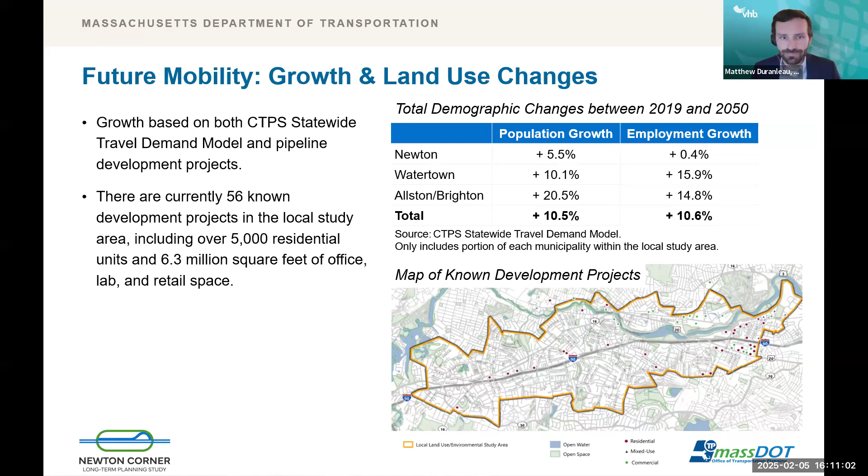We also coordinated with local municipalities and agencies, many of you on the call today, to anticipate changes to the transit and roadway network. On the transit side, there are several improvements currently under development, such as the bus network redesign and the Newton commuter rail station accessibility improvements. As many of you are aware, funding for the Newtonville station accessibility improvements was awarded late last year. We understand transit will play an important future role in moving residents and workers around the study area, and all these transit improvements are incorporated in our 2050 future projections.

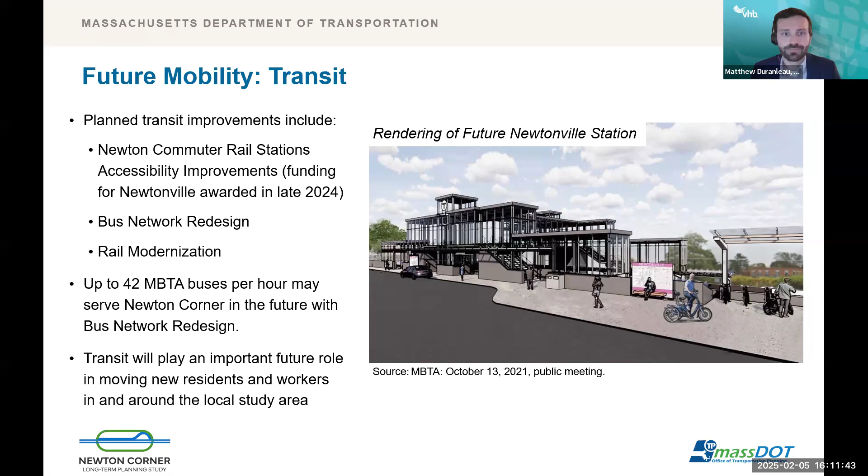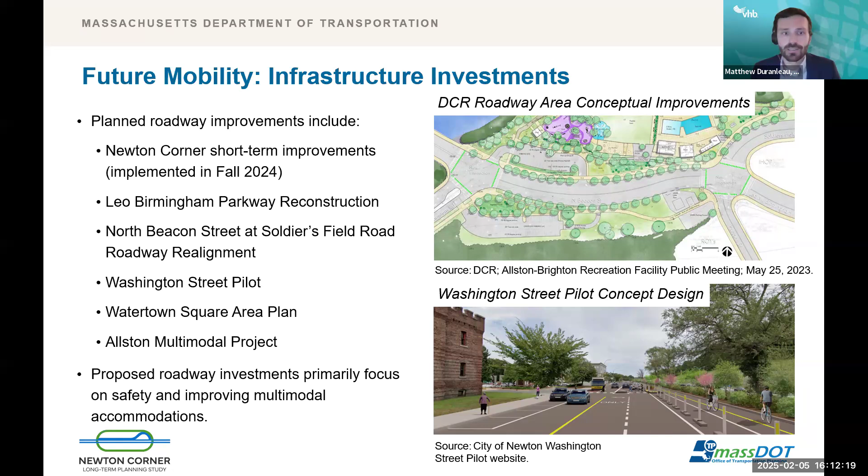Our future projections also included proposed roadway infrastructure investments. There are currently several roadway improvement projects under development in the study area, including the Leo Birmingham Parkway reconstruction, the North Beacon Street at Soldiers Field Road roadway realignment spearheaded by DCR, the Washington Street pilot in Newton spearheaded by the City of Newton, and the Watertown Square area plan in Watertown, to name a few. A common theme in these proposed improvements is that they are primarily focused on improving safety and enhancing multimodal accommodations as opposed to increasing vehicular capacity.

On the active transportation side, we identified several new and proposed facilities for bicyclists, such as new infrastructure on North Beacon Street, Western Avenue, Mount Auburn Street, and Washington Street. Most of these new facilities will improve bicycle connections in the east-west direction. However, based on the currently proposed improvements, there are still expected to be gaps in the future network in the north-south direction, including across I-90 and connecting to and from the Charles River pathways.

With the proposed land use changes and known infrastructure improvements, we reviewed the anticipated volume and ridership growth in the study area. Using the statewide travel demand model, which includes known transit and roadway improvement projects, and calibrating based on known development projects, we found that transit ridership is expected to increase by about 12 to 28%, and vehicle volumes are expected to increase by 6 to 13% in the local study area by 2050.

Transit ridership is anticipated to grow quicker than vehicle volumes due to improved transit infrastructure and limited capacity on the roadway network for additional demand. However, the overall mode shares by 2050 are not expected to dramatically shift, as current network users are not anticipated to alter their mode choices substantially.

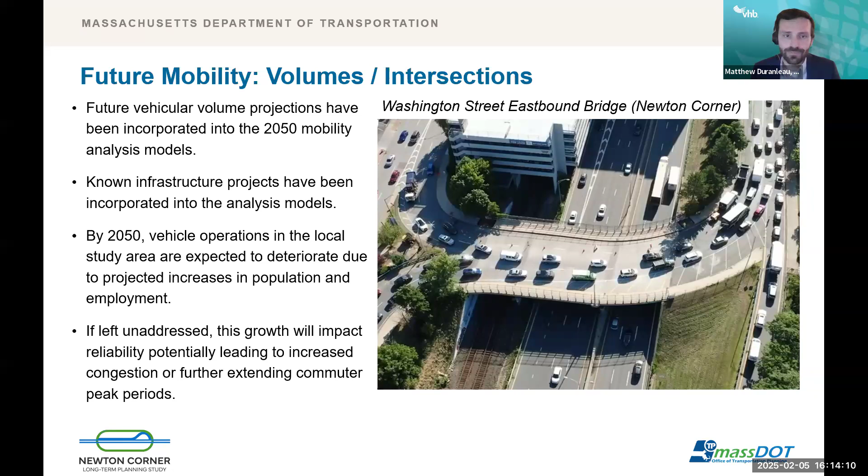The final future conditions element we want to highlight today is future environmental considerations. The study area faces significant risks from extreme temperature fluctuations, increased precipitation, and flooding along the Charles River. By 2050, Massachusetts is expected to experience significant temperature increases. It's important to remember these environmental considerations as we progress into alternatives development.

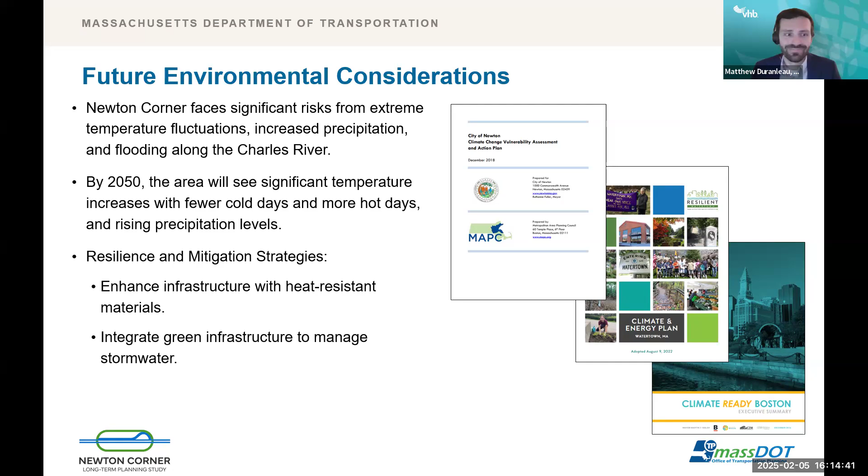As part of this study process, we are documenting issues, opportunities, and constraints. We began this process back in existing conditions and shared a snapshot of the themes related to existing conditions back in October. These were based on a review of existing conditions data, previous studies of this area already completed, and input from all of you, our working group.

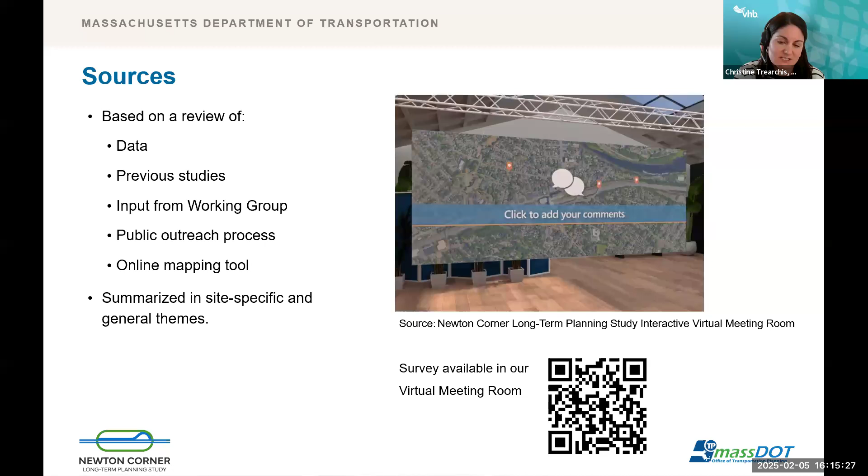Here's a summary of the issues, opportunities, and constraints. I want to note that this is not a complete list, but rather a highlight of some key takeaways. While we've previously highlighted safety, there are persistent and well-documented safety issues. Newton Corner is a high crash location with difficult merges and confusing travel patterns.

Like much of the Commonwealth, our study area is vulnerable to climate change and is anticipated to face extreme temperatures and flooding near the Charles River in the future. Many of the intersections within our study area have documented accessibility shortfalls that should be addressed through the alternatives.

There are opportunities to leverage the existing and potential future MBTA transit services in the area, providing clear connections to bus and commuter rail services. Similarly, there are opportunities to help connect bicyclists and pedestrians to the existing Charles River pathways. While these connections are just a short bicycle ride or walk from Newton Corner right now, they currently are not very comfortable or direct routes, leaving opportunities for improvement.

From an environmental standpoint, we have an opportunity to expand green infrastructure to help reduce heat island effect, improve public health, and manage stormwater. Our study area is also home to natural, historical, and archaeological resources to consider. The Charles River is nearby, and Newton neighborhoods are known for their historic character. Between Route 128 and Boston, there are limited highway exits, which means Newton Corner has to process a significant amount of vehicular traffic. The I-90 corridor and MBTA rail lines act as a barrier for north-south mobility for modes currently.

We've organized initial alternative ideas into three parts. The first is what we're calling supportive elements, which are elements that should be considered under all alternatives. Next are alternative components, individual components that can be layered onto each other to develop full alternative packages. Finally, we have a few examples of how these components could be layered together. We understand there are many different combinations, and these are just a few examples to spark conversation.

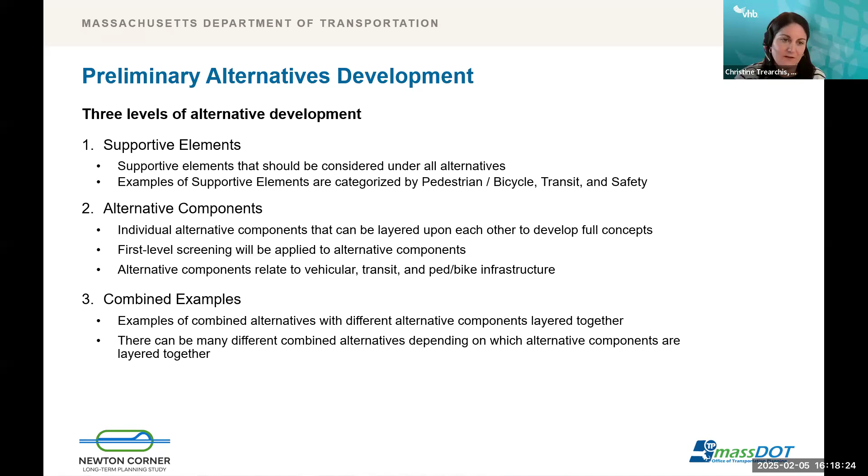First, we're going to go through the supportive elements, starting with pedestrian and bicycle elements. Every alternative should seek to create new pedestrian and bicycle connections through Newton Corner, as well as to existing Charles River pathways. We're looking to develop on-road bicycle accommodations and find opportunities for separated bicycle lanes. We've also included placemaking here, creating an inviting pedestrian environment that makes Newton Corner feel like more of a destination.

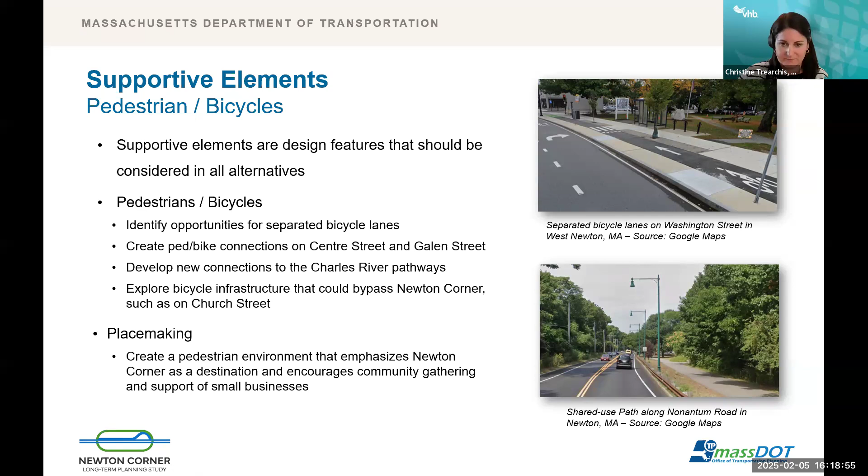Next are transit elements. These are aimed at finding opportunities to incorporate things like transit signal priority, enhancing connections to existing services such as the buses and the Newtonville station, which will be going through improvements to come.

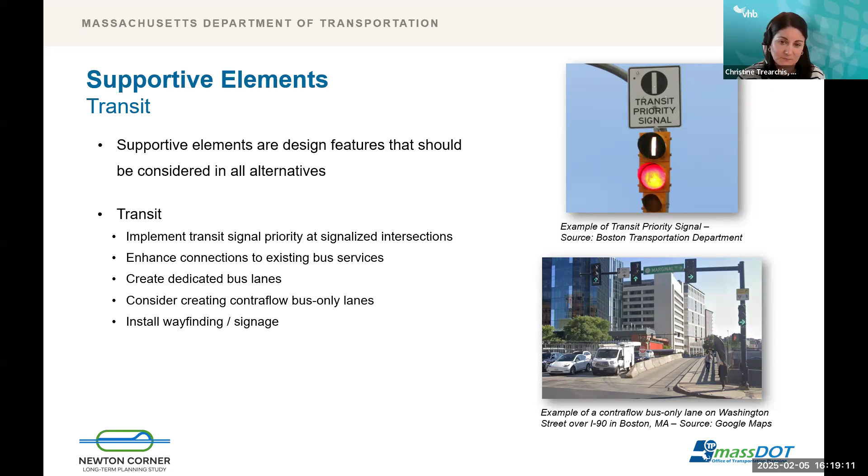Finally, our safety elements. These include trying to provide more conventional and straightforward intersections for motorists, including consideration of roundabouts to reduce conflict points, as well as adding fully accessible pedestrian accommodations and improving things like lighting and signage.

And now I'm going to hand it back over to Matt to discuss the alternative components.

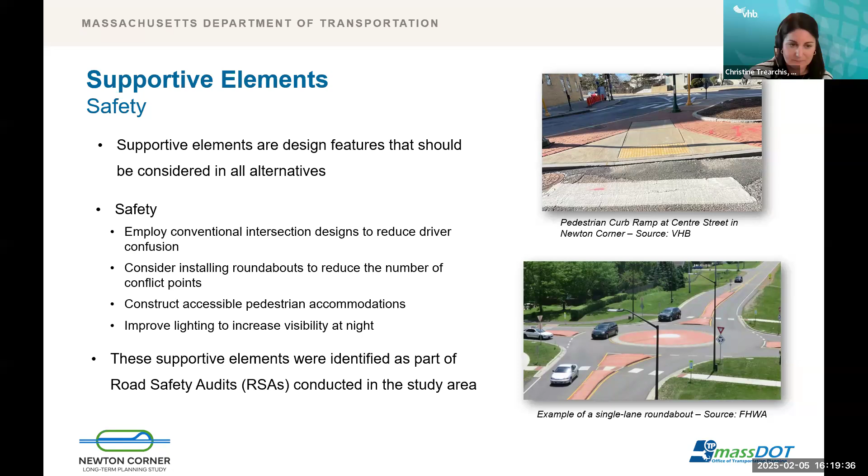Thank you, Christine. Today we have 16 different potential alternative components that we are going to touch upon. These represent an initial list we developed based on previous feedback that we've received, and we anticipate that additional components may be considered based on feedback from the working group and from the public.

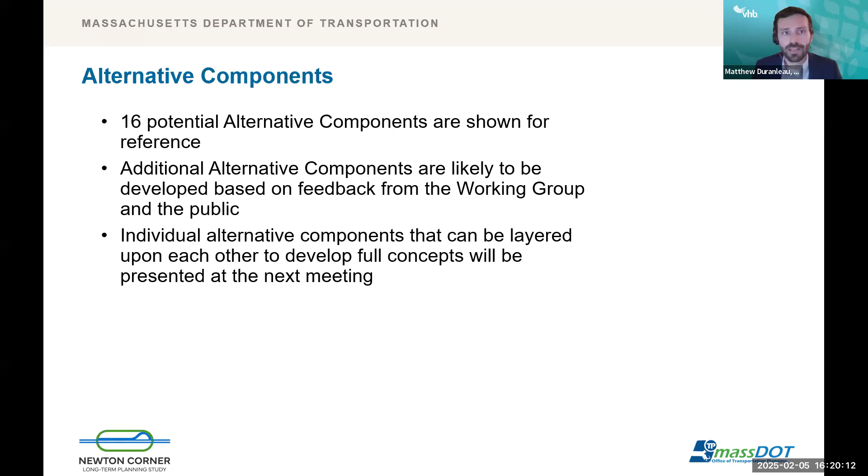These individual alternative components can be layered upon each other to develop full concepts that will be presented at the next meeting. As I go through each component, I know it might be difficult to fully digest everything I'm about to present. Right now, I just want to introduce each of the components, and then we can dig into them a little deeper in the breakout rooms, where all of the slides will be available for everyone to review.

Jumping into it, our first alternative component is looking at two-directional travel in Newton Corner. To minimize weaving and increase safety, this would allow bi-directional travel on roadways in Newton Corner, including on Washington Street north and south of I-90, and on the two existing bridges over I-90. This is an idea that we've heard in the past from the public, and it's likely that this component will be incorporated into future full concepts as one individual component.

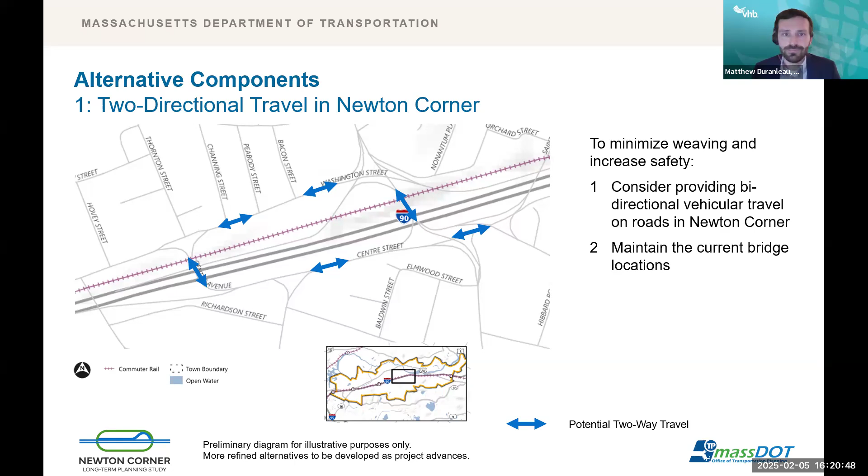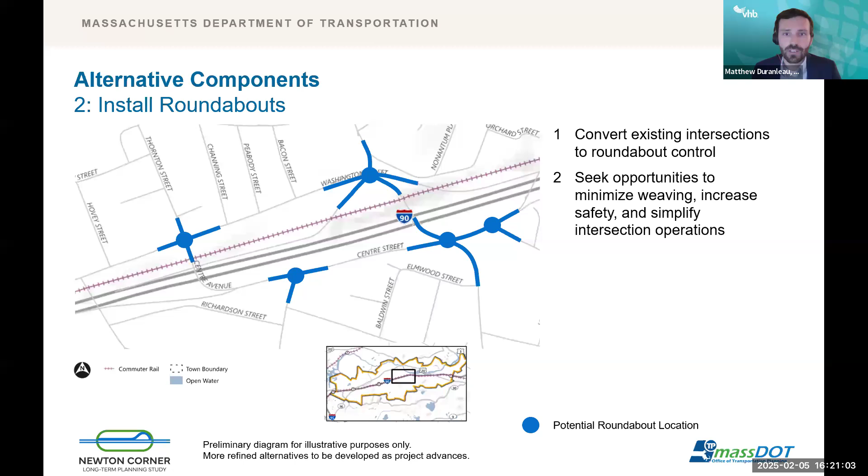Another idea that we have heard is the consideration of installing roundabouts. Roundabouts can increase safety and simplify intersection operations. The next stage of the alternatives analysis would evaluate what locations would be appropriate for roundabout control.

Moving on to the third component, this one is a little bit more out of the box. This component is a new bridge connecting Centre Street south of I-90 with Centre Street north of I-90. This would restore the historic roadway network of Newton Corner from before the interstate was constructed. A new bridge at this location could provide bi-directional travel for vehicles, pedestrians, and bicyclists, and could help simplify overall operations.

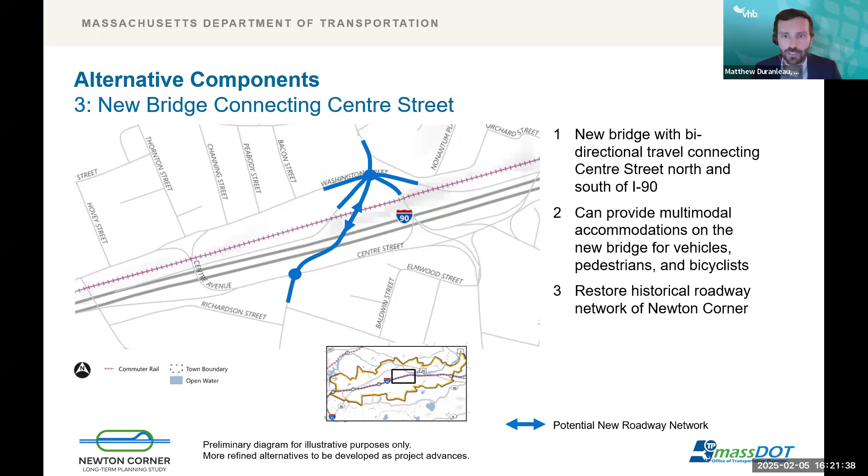Moving on to the next component. I know there's a lot and we're going through these a little bit fast, but we'll be able to discuss them in detail in the breakout rooms. This fourth component looks at closing the existing I-90 westbound on-ramp and relocating it to a new location west of Newton Corner. Moving the I-90 westbound on-ramp would simplify operations at the current intersection in the northeast quadrant of Newton Corner. However, we would need to evaluate the feasibility of a new interstate connection west of the current location and understand how that would tie into the overall roadway network.

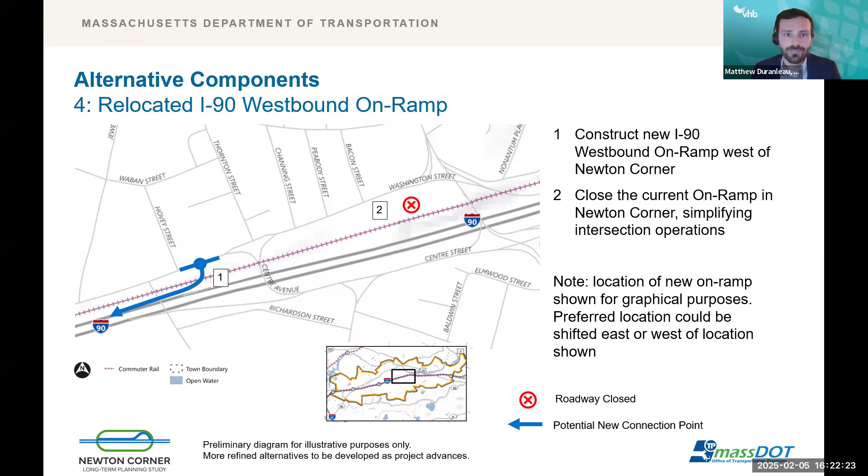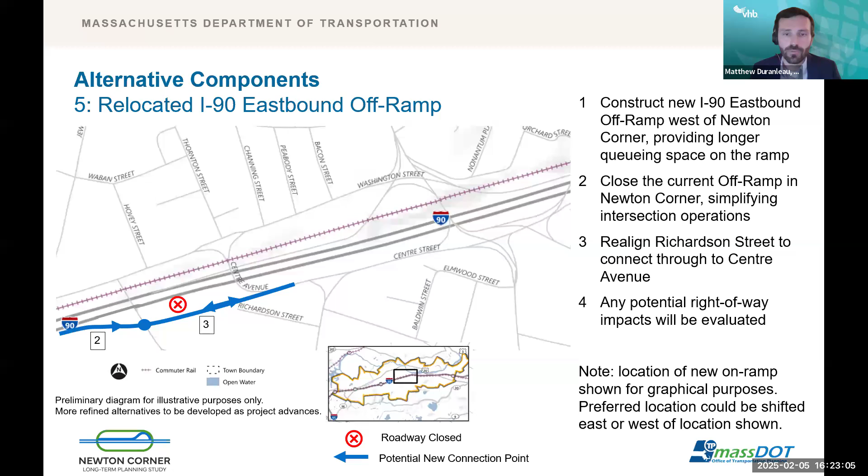Okay, moving along, the next few components are going to look at enhancing transit accommodations in Newton Corner. This component looks at repurposing the existing Washington Street westbound bridge as a dedicated transitway.

Now this alternative needs a little more detailed explaining. If a new Centre Street to Centre Street bridge is constructed, as I talked about earlier, there's a potential to repurpose the existing westbound bridge for a different use. Here we are showing a transitway, which could serve as a bus hub for all buses traveling through Newton Corner.

The benefit of providing a bus hub and transitway in this location is that it aligns with the routing of the MBTA Route 57, which goes up Galen Street and down Washington Street into Brighton, a key bus route expected to run every 6 minutes in the future with bus network redesign in place.

The next component considers creating a bus transit hub in Newton Corner while maintaining the current bridges for vehicular use. Shown here is an idea to deck over part of I-90 to provide a new mobility hub that would give passengers a comfortable place to wait and create one centralized location to connect with additional transportation services.

This component would allow for bidirectional transit travel on the existing Washington Street westbound bridge. Separate stops would be provided in the inbound and outbound directions, and a safe pedestrian crossing would be installed connecting riders to both sides. As I mentioned before, these are just concept ideas, nothing has been fully fleshed out, so the image on the graphic is just a potential concept.

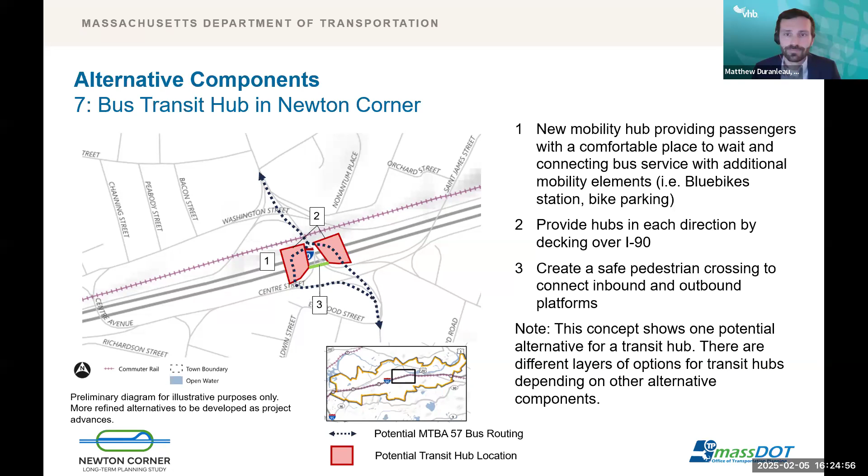Another potential component is a commuter rail station in Newton Corner. Currently, the Worcester line of the commuter rail travels through the study area, but trains do not stop. The nearest stop is at Newtonville, approximately 1 mile west of here.

Based on coordination with the MBTA, any future decisions about implementation will need to be evaluated holistically from a multimodal perspective, especially regarding how it impacts service throughout Newton and along the entire Worcester Line corridor. Shown on the graphic is a possible station location with pedestrian access provided from both sides of I-90.

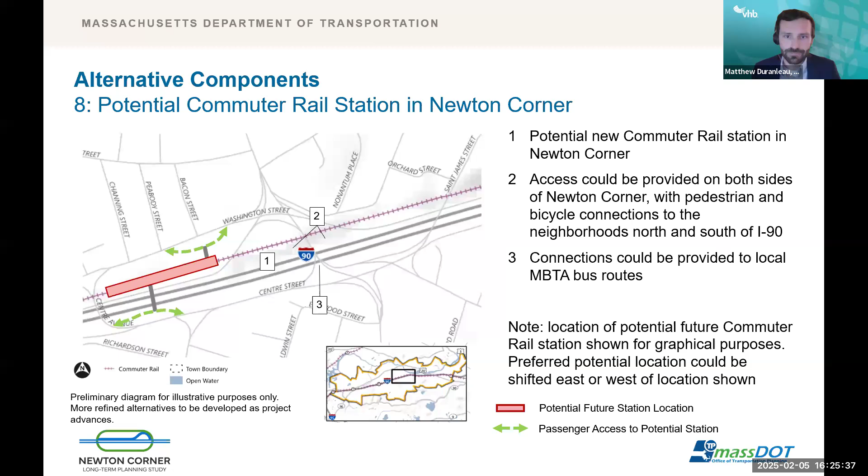All right, moving on. The next component involves decking over I-90. There's potential to use decking to provide space for multimodal uses, bike paths, transit bus stops, mobility hubs, additional green space, and/or community space.

Decking has a lot of potential uses that could help improve mobility and advance the study goals. Decking could also be used to help create a village center in Newton Corner and provide a more welcoming environment for small businesses.

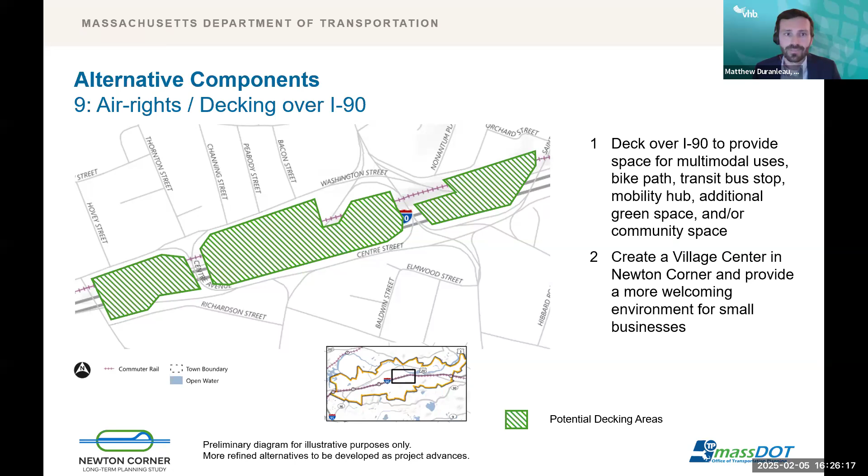All right, moving along. Now the next few components are going to focus on pedestrian and bicycle infrastructure. This component looks at repurposing the existing Washington Street eastbound bridge, similar to the transitway idea I talked about earlier.

If a new Centre Street to Centre Street bridge is constructed, as talked about in the third component earlier, there's potential to repurpose the existing eastbound bridge for a different use. Here we are showing a pedestrian bicycle only bridge, which would provide a safe and comfortable way for pedestrians and bicyclists to cross I-90, separated from vehicular traffic.

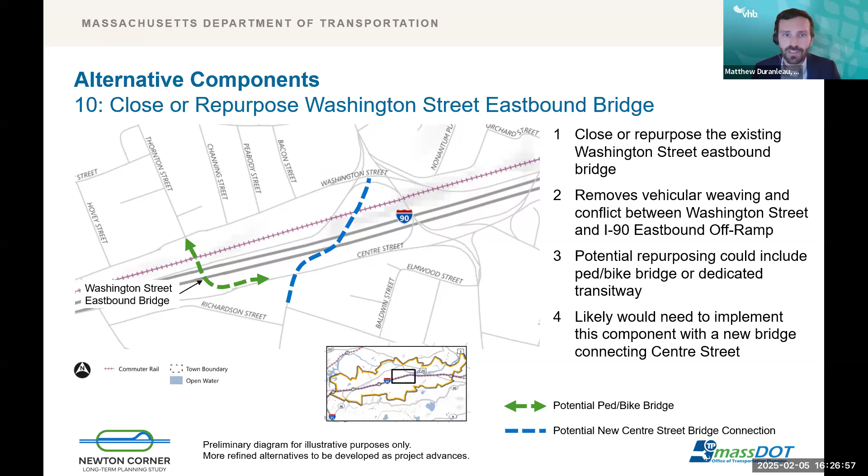Another component could be to construct a new pedestrian bicycle only bridge over I-90 while maintaining the existing vehicular bridges. This would separate pedestrians and bicyclists from vehicular traffic and provide a safe and comfortable way for them to cross I-90. The exact location of a pedestrian bicycle bridge will be evaluated.

At the location shown on this graphic, a bridge could potentially tie into Centre Street north and south of I-90, in a similar alignment to the Centre Street to Centre Street Bridge we've talked about in previous concepts.

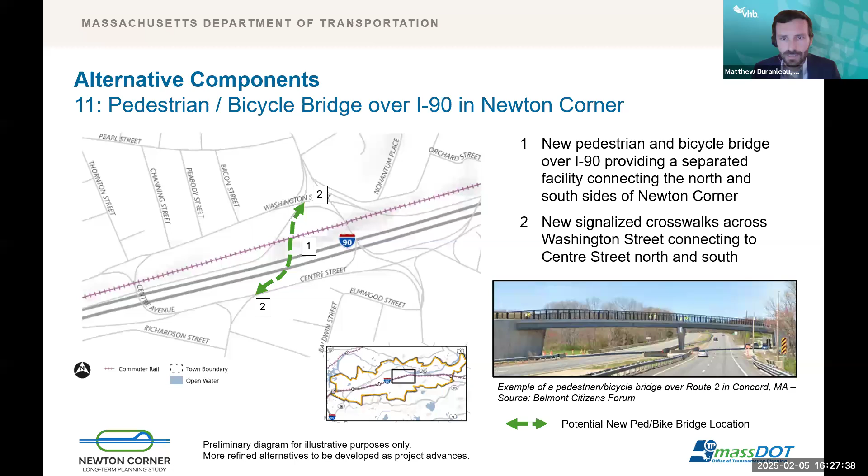Sticking with the theme of pedestrian and bicycle connections, we looked at ways to better connect Newton Corner to the Charles River pathways. This component would create a neighborhood greenway along Charlesbank Road, connecting Newton Corner to the Charles River, which is in close walking and biking distance.

The neighborhood greenway would be shared with vehicular traffic, and traffic calming measures could be implemented to ensure slow vehicular speeds.

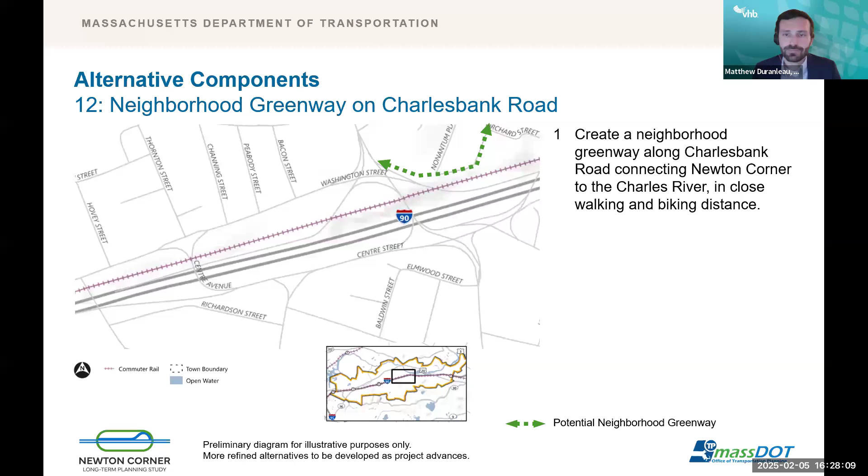Another potential way to connect to the Charles River pathways could be with a shared use path along St. James Street. This would likely require converting St. James Street to one way for vehicular travel to provide space for the shared use path, but it would provide a direct connection for bicyclists and pedestrians from the south side of I-90 to the north side. The shared use path could either follow along Charlesbank Road to Nonantum Road, following the path that vehicles take today, or it could follow a new connection to Nonantum Road along St. James Terrace, constructed for pedestrians and bicyclists only.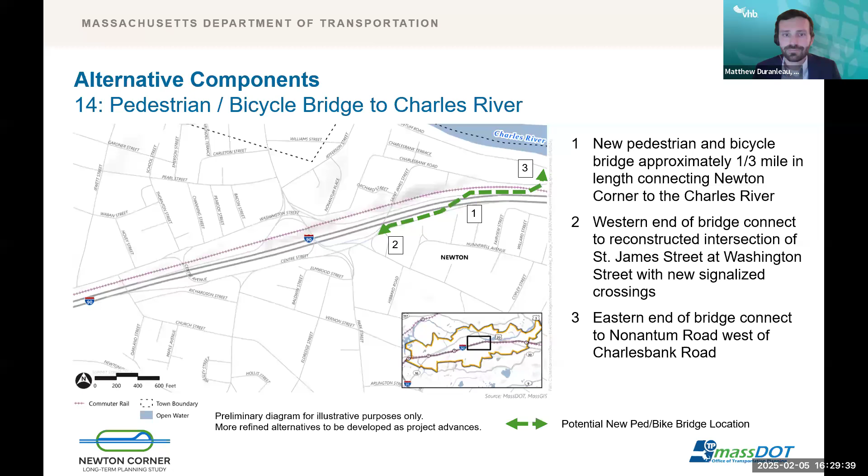All right, last couple alternatives. Looking beyond Newton Corner, this alternative component would construct full interstate access at West Newton with a new eastbound off-ramp and westbound on-ramp. This would provide additional access from the west on I-90, and it would relieve reliance on the Newton Corner interchange. If this alternative were to progress, the study team will need to evaluate constructability and potential right-of-way implications.

The potential concept shown on the graphic is just one possible idea. If this idea were to progress, we would do a full evaluation of where would be the best places for these ramps to tie into the roadway network today.

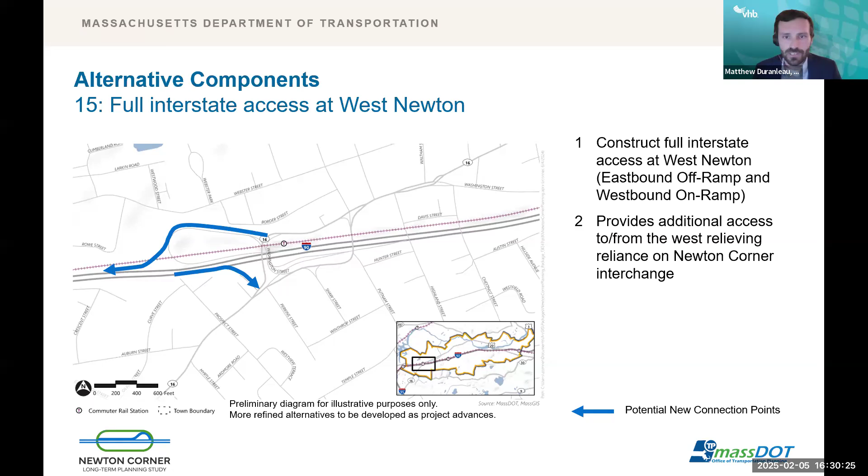The final alternative component I'm going to talk about today is full interstate access in Brighton at the DCR roadway area. This has been included in previous planning studies for Newton Corner and could include full or partial interstate access. However, there would likely be constructability issues and impacts to DCR property, including protected parkland. So this alternative will need additional thought and analysis.

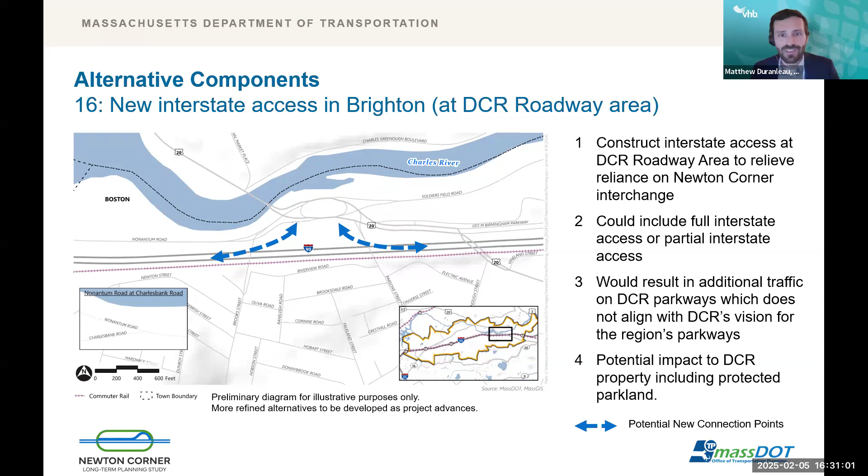I've talked about a lot of different individual components, and now I'm going to hand it back over to Christine to show some potential ways where you could combine these components and tie it all together.

Thank you, Matt. I know that was a lot to get through. Now I'm going to provide a few examples of how we could combine these components. I want to clarify these are just three examples of seemingly endless possibilities, but we've developed a few examples to spark conversation. We are interested in your feedback during our breakout rooms on these, as well as any additional ideas or suggestions you are willing to share.

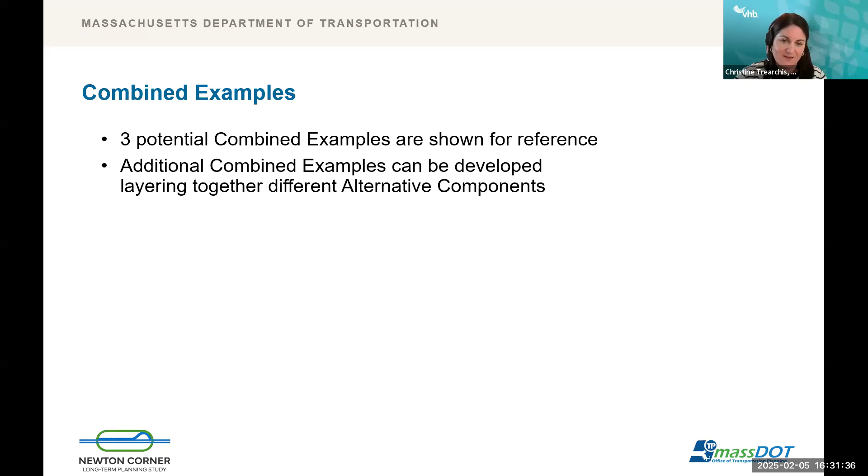The first combined alternative example is focused on utilizing the existing infrastructure and right of way, but considering converting one directional travel to two directional travel on the roadways through Newton Corner. This alternative maintains the existing bridge locations but seeks to simplify movements, minimize weaving, and improve safety. As an added layer, we could also consider reallocating existing right-of-way to accommodate non-vehicular modes in addition to vehicles.

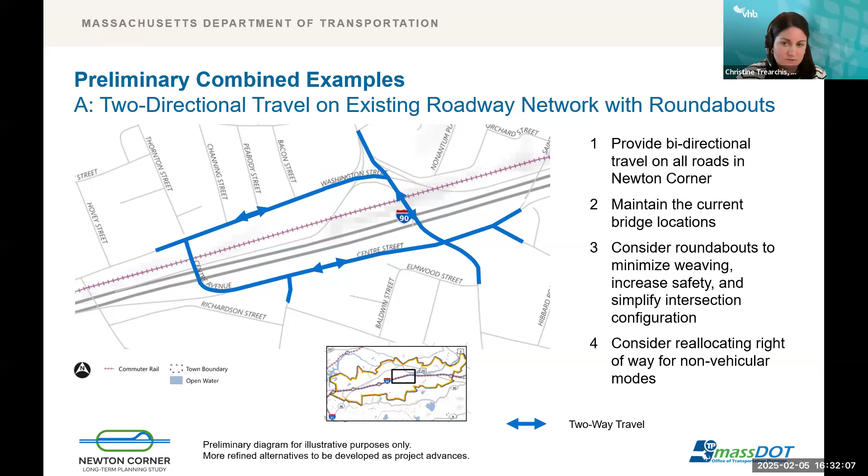Our example B provides a new bridge connection north-south, reconnecting Centre Street. This has been combined with relocating the I-90 westbound on-ramp in order to simplify that intersection in the northeast quadrant. We then layered on options to repurpose the two existing bridges, one into a pedestrian and bicycle shared use pathway, and one into a transit way that could support a bus hub. This option also includes considering two directional travel on Washington Street, both north and south of I-90. Another added way to achieve enhanced pedestrian and bicycle accommodations is to utilize Charlesbank Road as a neighborhood greenway, facilitating connections to the Charles River and Nonantum Road.

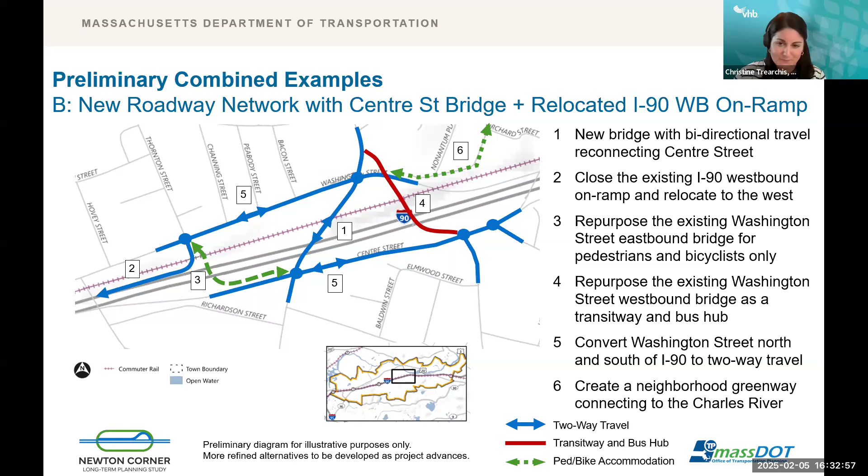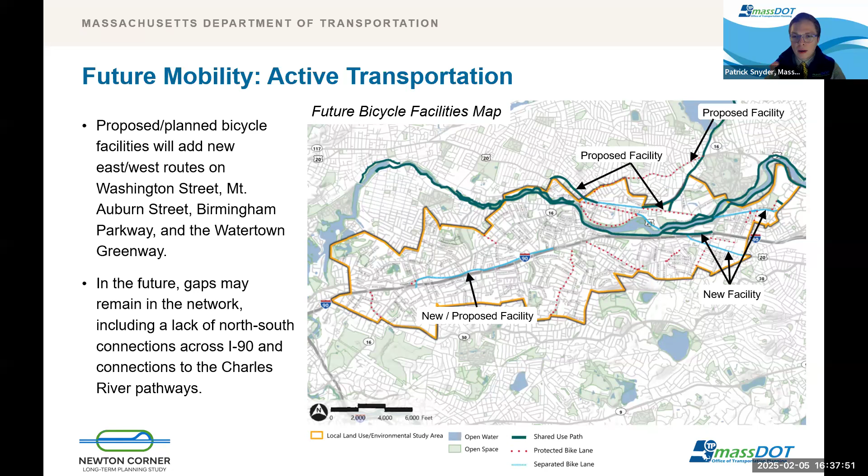Thank you, and just so you know Christine, we don't have an option to post to the general chat, we can only send it to one person at a time on the VHB side, so for whatever reason it was defaulted to your name. Apologies, Christine. No, it's perfectly okay, but just so you know, nobody can chat to everyone - or you guys might be able to, but we can't. Thank you for mentioning that, Councilor Oliver. Sometimes Zoom is a little funky, so for everyone's benefit, if you want to ask a question or comment, send it directly to me, Patrick Snyder, or Christine Trearchis.